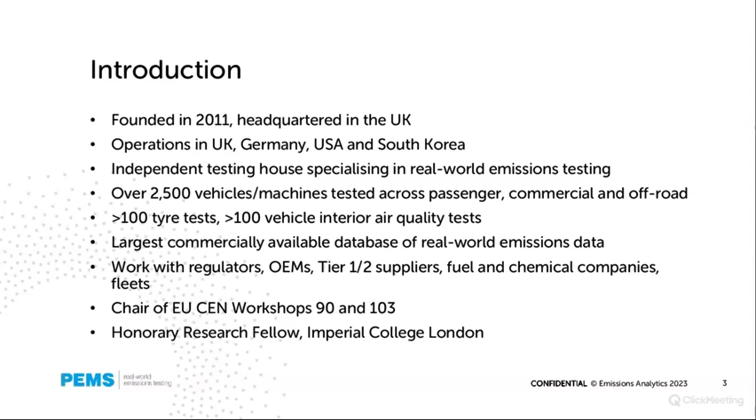So the agenda today, what I wanted to cover is a sort of recap of what the challenge is, really trying to keep it at a high level understanding of what the issue is, rather than getting drawn too much into any one specific area. Then I wanted to talk about the methodology that we've developed, which we think is an innovative way of trying to understand what's going on in the real world.

And then use that with some examples of renewable diesel that we've tested and renewable gasoline, not just looking at regulated pollutants, but also unregulated emissions as well. And the final bit would be to look at the issue of the actual chemical composition of the fuel itself. So looking beyond the basics of, is it EN 228 compliant or not, actually in much more detail than that, and how that might help us explain the provenance of these renewable fuels.

So moving into what is the problem? Well, it almost goes without saying, we're trying to reduce climate change related emissions and also improve air quality. The issue with renewable fuels, which is the flip side, of course, of the opportunity, is that they are there first and foremost to reduce life cycle CO2 emissions, so to contribute to the climate change solution. But the question relating to that is, how much do they actually reduce CO2 in practice? They often sound good, and from a marketing point of view, what's not to like? But by how much do they actually reduce in practice?

So can they be a material contributor to our decarbonisation, or are the reductions too small, too expensive, too difficult, that we just have to go straight to battery electrification on the assumption that that is free of emissions, which obviously it's not, but that's a topic for another day.

One other aspect of renewable fuels is maybe they reduce tailpipe emissions, but maybe they lead to increases in certain pollutant emissions. So what might we not know about hidden other increases in emissions? And there is also the important distinction that it may be okay to increase emissions a little bit if it's from a very low base and it still remains well within some regulated limit or health threshold. So the question is, where there are increases, does it take us above any existing limit values?

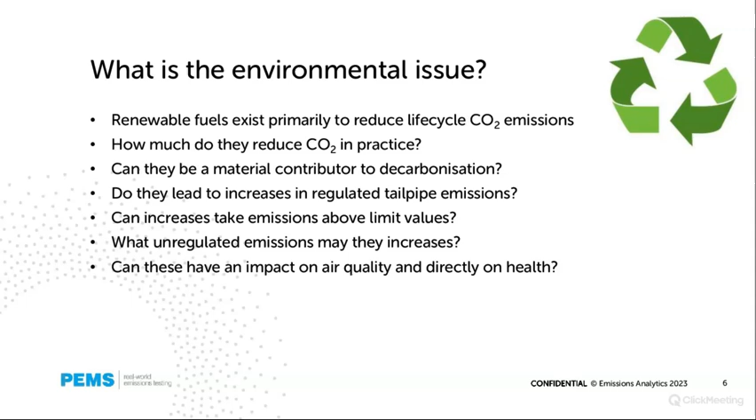And similarly here for unregulated emissions, there are obviously no limit values, but do they lead to some worrying levels on some other criteria? And also, can these have a direct impact on air quality and on health? And how do we understand that? So that's the issue at a very high level.

What is a renewable fuel? We need to be clear, and that covers a very diverse group of products. And it's an evolving definition as well. But the best way I can describe it right now is that these are fuels which are produced from renewable sources rather than fossil fuels. And actually, I should be clearer than that to say produced in part from renewable resources, because many of these first, second generation renewable fuels still have a potentially significant fossil fuel component. So it has some element of renewable non-fossil fuel component in them.

And examples would be bioethanol. So within that, the E10 we now find in the UK and some other European countries contains bioethanol blended into gasoline, where that ethanol is typically grown from crops. Biodiesel would typically use fats, which through transesterification substitute some of the fossil fuel components, and those fats can come, for example, from waste cooking oil. Biomethane, which we've done some testing on, for example, heavy-duty trucks converted to natural gas, where a proportion of that natural gas is biomethane, typically comes from the breakdown of organic matter such as anaerobic digestion. And those could be described as maybe the earlier generations of renewable fuels.

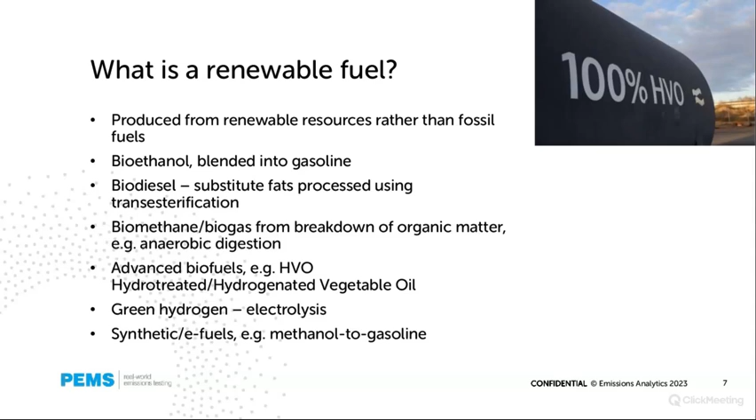And then finally, as we talked about right up top, the synthetic e-fuels question, for example, creating gasoline from methanol, which itself is created from a combination of sequestering CO2 from the air, combined with green hydrogen to create a near zero CO2 liquid drop-in fuel. I realize that is highly simplifying the matter, but just to give an overview of the landscape, I think that is a reasonable definition of what renewable fuel is.

And the challenge related to this is that we're essentially, for the intermediate ones, inserting some, quote, bio components into fuels, which may change the combustion characteristics for good or bad, and may change the energy density, often lowering the energy density, but also have an effect on the efficiency of combustion. And different combinations have different effects. It's not always in one direction. But nevertheless, this change in chemical composition can lead to an alternative mix of tailpipe pollutants.

Point one, and that's sort of the air quality related element of it, but also the CO2 reduction potential of these fuels doesn't tend to manifest itself at the tailpipe, though any changes in CO2 tend to be small. The CO2 reduction exists upstream in the supply chain, through using waste material or crops, which suck up carbon as they grow. And therefore the verification, we can't go along with a piece of PEMS equipment and go verify that CO2 reduction because it exists up the supply chain. But nevertheless, verifying that carbon reduction is really vital to understand the benefits of these fuels.

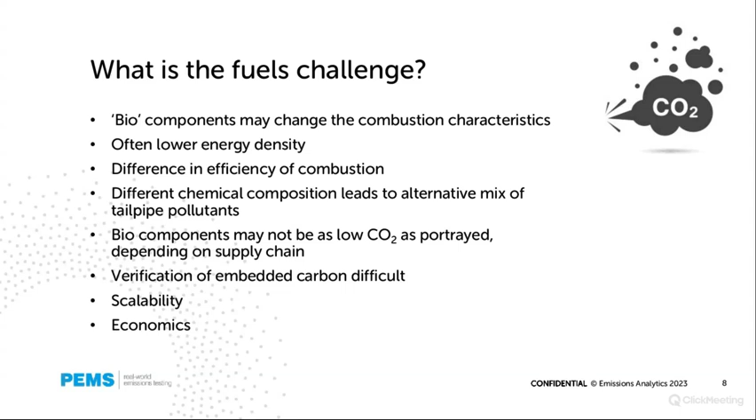And then also linked to it, which we won't cover today, is the questions of, this might work at small scale, but can it scale to anything that will help at a system level and economically as well? So that's the problem. Our concept for how we approach trying to test for this and understand it is what I would describe as holistic and comprehensive. Holistic in the sense of considering all the different vectors for the car creating an environmental impact, and comprehensive in the sense of trying to understand, as comprehensively as possible, what the pollutants are.

And this picture sort of neatly encapsulates what we do. So we are testing on the road, real cars on the real road, real drivers, real routes. Top right, we are obviously looking at the tailpipe, but as I will show, we are looking at an increasing number of pollutants from the tailpipe. There's tires as well. Now, tires is not relevant to today's presentation, but tires shed matter and off-gas VOCs, etc. So they are vitally important in the whole environmental impact of vehicles, and actually do have a tangential relevance to this topic, where substitute materials are being put in tires, for example, soy-rich tires. So in a sense, renewable tires, if you like. So we're not covering that today, but it's why you can see it's an integrated part of our approach.

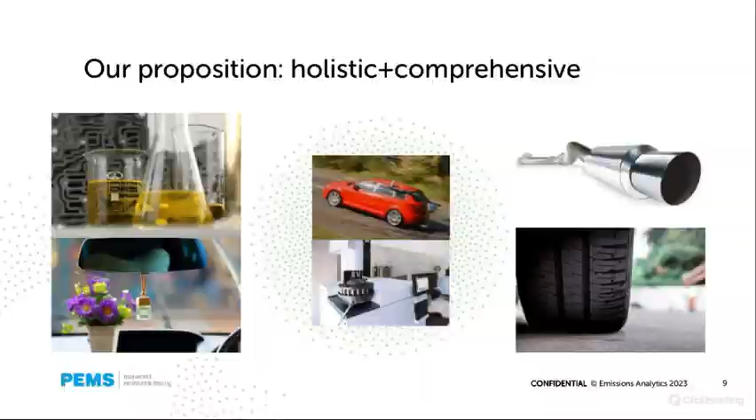Then we have vehicle in-cabin air quality. It's a massively underrated issue of, when we focus on air quality externally, how much actually gets inside vehicles and stays caught up inside vehicles. So in a sense, any pollutants that come out of the tailpipe can also be recycled into the cabin as well. And the final one is understanding the composition of the fuels. So for today, it is basically top left and top right that we're focusing on, the actual fuel composition and the tailpipe emissions themselves. And the equipment we use, and I'm going to skip over this first bit relatively quickly.

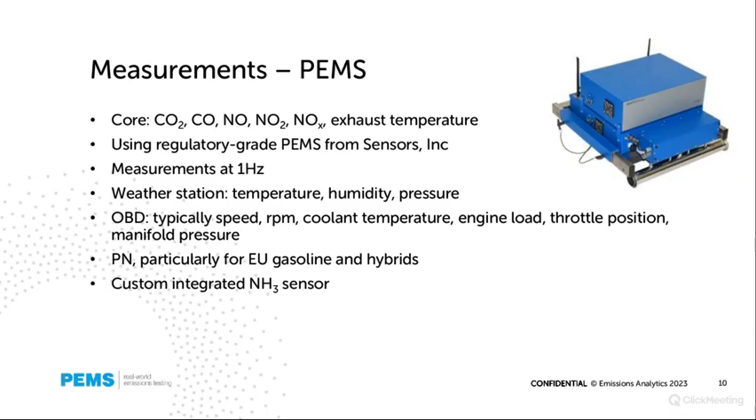Most of you will be familiar with the standard regulatory compliant PEMS measuring CO2, CO, NOx, etc. Also with particle number integrated and in real time, at 1 Hertz, OBD logging, etc. But to that, we have created a patent pending system which allows us to sample exhaust gas onto a range of thermal desorption tubes as the vehicle drives around, using a proportional dilution system, which allows us to capture that and derive from it distance-specific mass emissions.

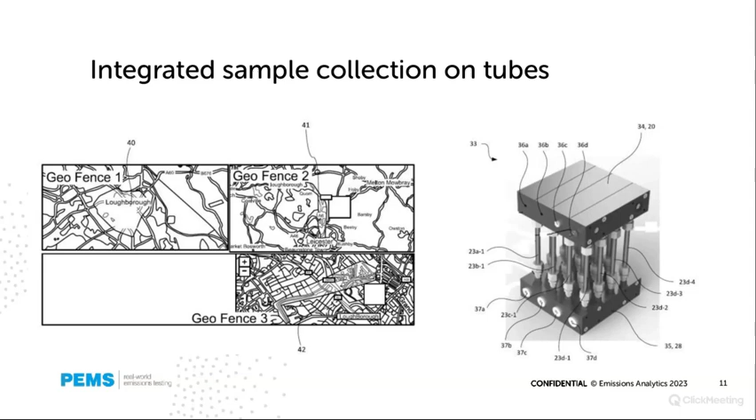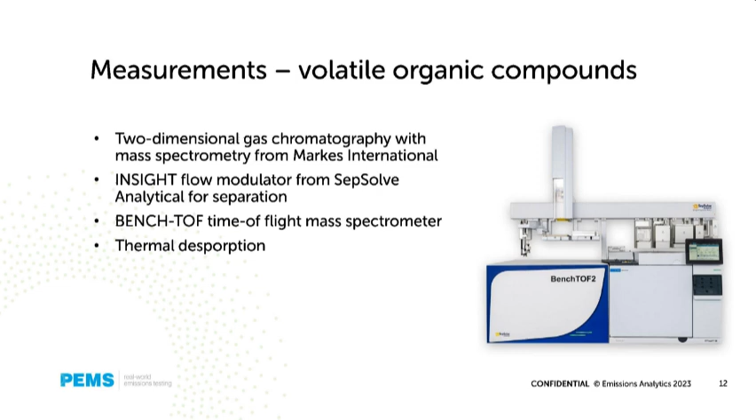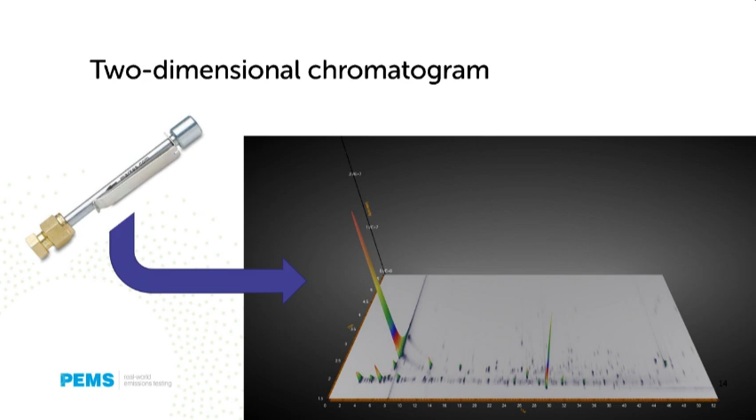And when we thermally desorb a tube, this will give you an example of what we see in the two different time dimensions of separation, and then the height of the peaks here. So each peak is one compound, and the height is an approximation to the mass present. So you can see typically in the example we are seeing hundreds of compounds off any particular tube, but in wildly varying concentrations, and the sensitivity of this system is at least at the ppb level, if not lower.

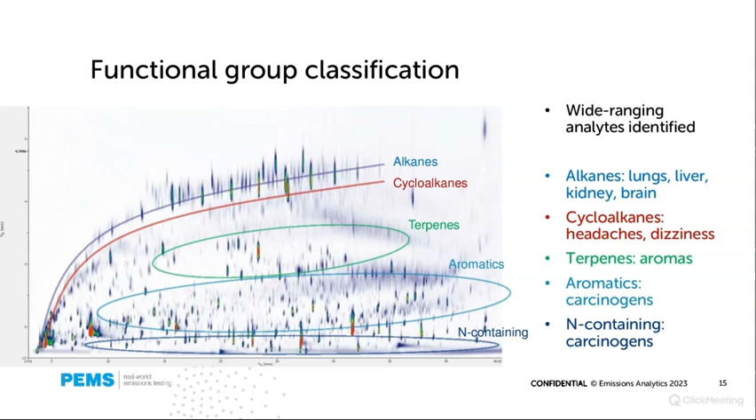It gives us an absolute wealth of information, but to make any sense of it at all, we have to group all these hundreds of compounds into some meaningful functional groups. So alkanes groups or terpenes or aromatics, which as shown on this chart tend to have common health and environmental effects, not consistent, but they associate with one another. And I'll come onto that a little bit more later on. So that's how we do it.

So let's move on now to looking at some renewable diesel and then some renewable gasoline. So the renewable diesel, I'm sharing part of the results we did from a very interesting test project with Thames Tideway. For those who are not in London, Thames Tideway is a massive project to build a big new sewer across London. London sewers were built in Victorian times and London is in desperate need of this big new sewer, which is getting close to completion. But excavating this created huge amounts of earth and other waste that needed disposing of.

And there was a twofold question. One, was it better from an environmental point of view to ship it along the Thames on a barge or stick it on lots of trucks on the road? That was question one. Question two was, is it better to power these vehicles by standard diesel, road or marine, or better to do it with HVO? Now here I'm just going to share the second part of that, so the standard diesel versus HVO results. And in this case, this was only on the truck part of it.

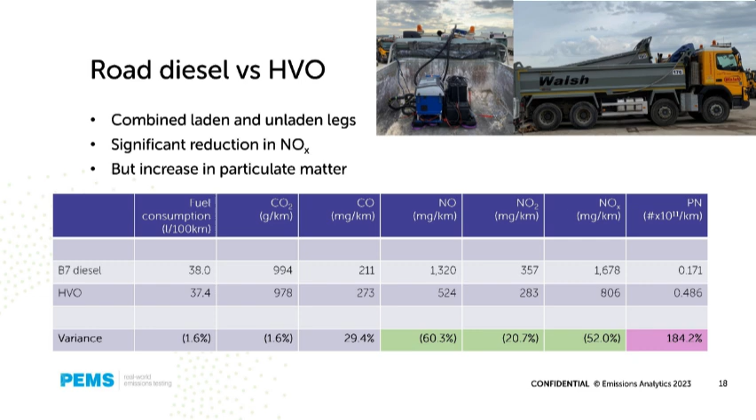In terms of the absolute levels we're seeing, particularly on the particles, it's well below. If we converted that to per kilowatt hour, or per kilometre, it's well below even the light duty limit. So this is my point I made earlier: even though it may be an increase, it is still not necessarily at a problematic level. But nevertheless, that is an area that may need to be looked at in more detail to mitigate, but we are crystallising some good reductions in NOx there.

But then there's the question. There's some benefits there definitely to be had, and there's some issues on the particle side to look at. But we need to look at the question of the provenance of these fuels. So were these fuels of the true origin? So this is now looking at, we tested a number of different HVOs from different sources and looked at the chemical composition of them. And I should just be clear, this was not linked to the Tideway test. This was a separate piece of work taking HVO from multiple different sources. And it's trying to get to the bottom of, when you buy HVO in the market, does it live up to the billing in terms of its credentials?

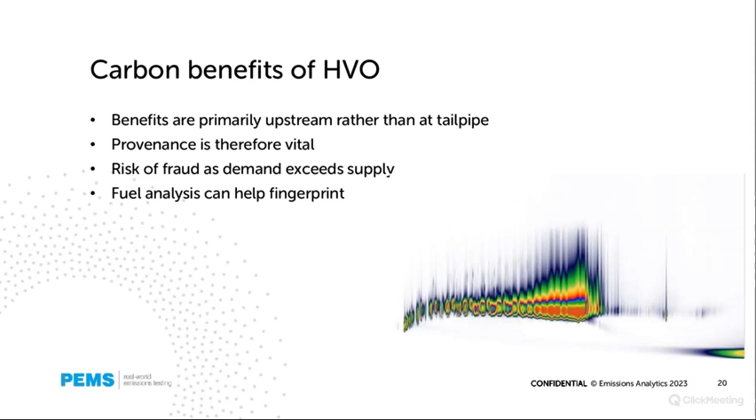And here, this is just a chromatogram, which shows what the chromatogram of a typical fuel will look like when you do a liquid injection to the 2DGC. And what that really is, it's a chemical fingerprint. So thinking about the idea of a chemical fingerprint, we can look at the actual results here. So there's 4 different types of HVO, different ones from different sources, compared to a B7 diesel reference.

And to keep things simple, I've shown a number of metrics here, which is the number of organic compounds that we found and identified in the sample, and then the proportion of the area under those peaks on the chromatogram that go in the aromatics and PAH group in percentage terms, how much are in the alkanes group, and also looking at it in terms of what proportion are oxygenated compounds. I know that does cut across the other 2 categories to some extent, which is why it doesn't add up exactly to 100%. But looking at the oxygenated percentage is also quite insightful.

So what we see is that typically we're talking in the hundreds of compounds, but it's the fossil fuel B7 diesel which has the highest number of compounds at 669. It should be noted that it goes to show how many organic compounds there are in these products anyway, and the complexity of understanding them. But what jumps out here is that of 4 different HVOs, so things marketed as HVO, 1, 3, and 4 are pretty similar. They're dominated by alkanes in the mix. They're in the sort of 200 to 300 level of organic compounds.

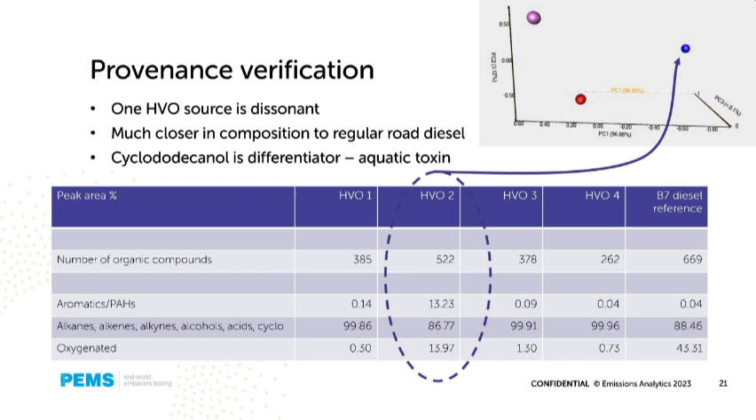But let's back up and not be quite as controversial, and simply say it is likely that the CO2 reduction credentials of HVO2 are not as good as the CO2 reduction credentials of the other HVOs. Therefore, if we are to scale these renewable fuels as solutions, then we need to understand these differences and bring about a much greater transparency and standardization about the composition. So that's on the diesel side.

Let's move on to gasoline. So for this, the main data I want to present is from a recent test program we did last October, which was looking at the difference between E0 and E10 in recent model year passenger cars in real world on-road driving. And the fuels here were blended specifically to EN228. This is all on the road at the same time of year, same conditions, on our standardized EQUA test route, which is about 3.5 hours long, made up of a combination of cold start, urban, rural, and motorway driving.

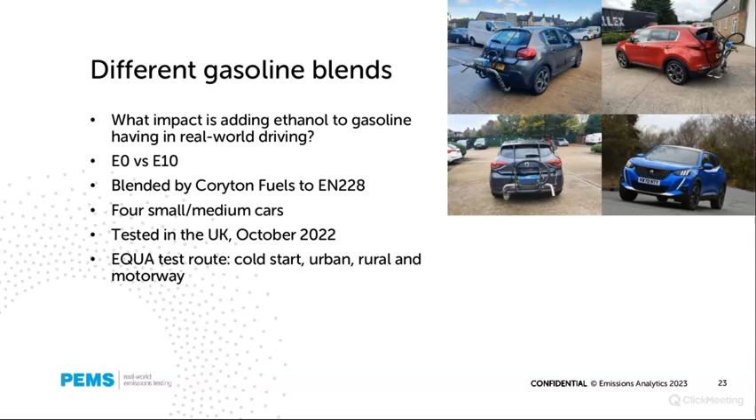And firstly, let's look at the regulated pollutants by vehicle, focusing on carbon monoxide and NOx. And here we're showing in the shaded boxes the direction. So green is good in that it's lower, and pink is higher. So what we actually see is quite a good level of consistency in the direction of these pollutants between the different vehicles. The average reduction in carbon monoxide was 31%. And the increase in NOx was 21%. However, it must be flagged that that absolute increase in NOx was small, i.e. from a very low base, and even on E10 was 90% below the regulated limit.

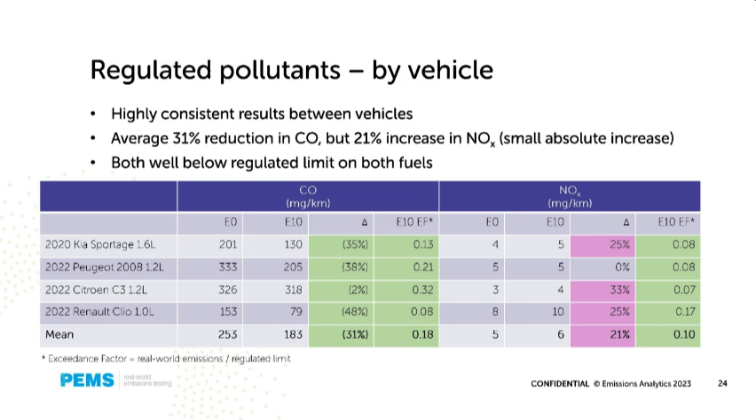So where I say EF, that is the exceedance factor, the ratio between the real world emissions and the regulated limit, which in this case for these Euro 6 vehicles would be 60 milligrams per kilometre. And also, the CO is well below in all cases as well. But we have to remember, gasoline vehicles don't generally have significant gaseous tailpipe pollutant problems anymore. So we're arguing about making slightly cleaner or slightly dirtier something which is already quite clean. But nevertheless, that's what we're able to measure and show.

But then let's look at some unregulated pollutants using the GCMS approach. And now, why are these important? So these are not regulated, and actually, sadly, they are not being slated for inclusion in the light-duty Euro 7 either.

So why these unregulated pollutants, particularly VOCs, matter is that they have an ozone formation potential, which can lead to increased smog levels, which we saw during COVID as the amount of NO2 in the air was reduced. They also have a secondary organic aerosol formation potential as well.

And the four areas I want to look at is firstly formaldehyde, which in terms of human health is an irritant. It does bad things to your lungs, and is a carcinogen as well. But it's not so much of a problem for other environmental reasons because it is non-accumulative. But other aldehydes, including acetaldehyde, can damage organs, can create inflammation and pain, are carcinogenic, cause heart disease as well, and for plants can inhibit growth.

Then I picked out toluene as a relatively high concentration organic compound in there as well, which is an irritation to skin, eyes, throat. It causes damage to some organs and is a possible neuro and reproductive toxin as well. It's also moderately toxic to fish and plants.

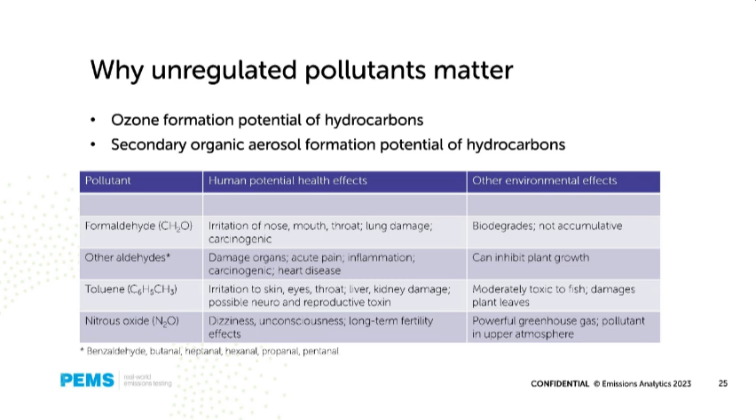So those are the four I wanted to pull out, although we do have the full chemical profiling of typically about 400 or 500 compounds in each exhaust. So here we are looking at this. This is summarized by vehicle across the combined cycle for those four different vehicles that you can see. And what we see overall, just at the macro level, looking at the color coding, is that there's a lot of variability between the vehicles and between the pollutants as well.

And so, I've given the mean figures there, and those means are disguising a lot of variation, but on average, there is an 18% increase in formaldehyde, but a 20% reduction in the other aldehydes. It's toluene that stands out as almost doubling, with big increases on three of the four cars. But interestingly, N2O, and maybe not very surprisingly, doesn't make a great deal of difference one way or the other.

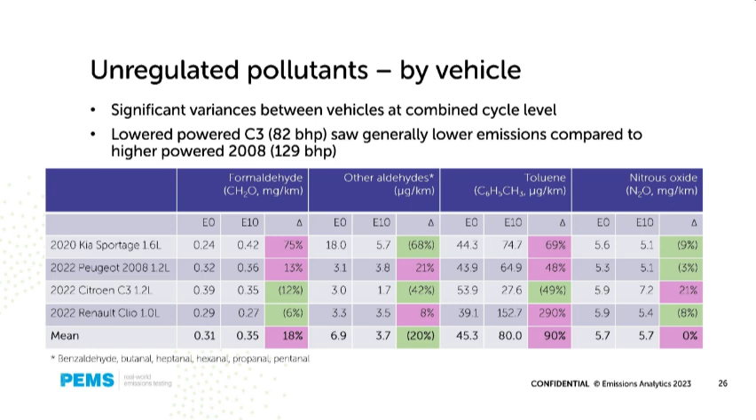And there are two cars there, the Peugeot 2008 and the Citroen C3, with the same base engine, but with different power levels, and therefore different calibrations, which lead to quite different results.

If we then cut the same data, but look at it by the different parts of the cycle, averaged across the four vehicles, we actually come to a much more consistent position, where the formaldehyde is up in all cases, as is the toluene. So at that level, there are obviously the mix effects which are creating these averages.

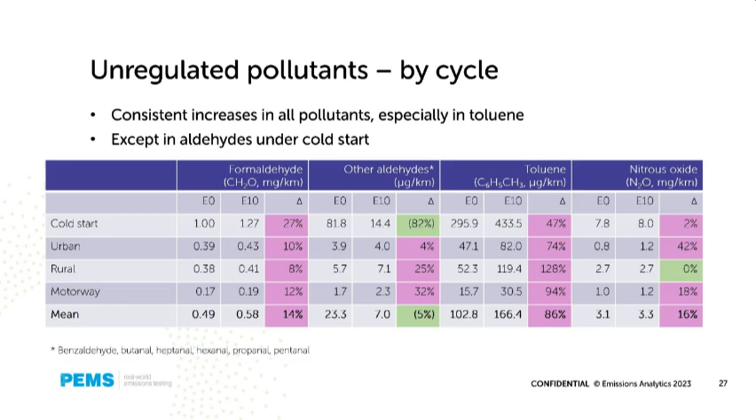But you can see particularly, say, in the cold start, the effects on the formaldehyde and toluene, but a reduction in aldehydes. But on the motorway, there are increases in all pollutants, and indeed on urban as well, and almost on rural too. So we can cut that data in lots of different ways.

But that was comparing E0 to E10, and in many countries in Europe we're increasingly at E10 already. So what happens if we push that 10 to a higher number? In the last bit of this presentation, we'll just quickly look at some work we did with Volkswagen and results they presented late last year at FAD in Germany, which was to look at some alternative blends, including E20.

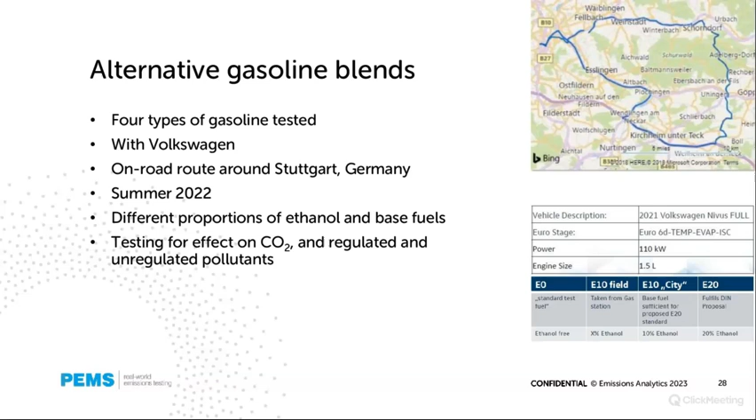So we tested four different types in the end, which you can see on this slide, on a Euro 6d-TEMP vehicle around Stuttgart in Germany, looking for the effect on regulated and unregulated pollutants again.

So on the regulated side, and you can see in the key, it's the far dark blue bar, which is the E20, that you do get lower CO2 emissions and particle number emissions as the ethanol proportion increases. But the CO emissions do increase somewhat on the E20. So a pretty good, not quite unambiguous, but certainly on the CO2 and the PN side, a clear trend of reducing emissions as the proportion of ethanol increases.

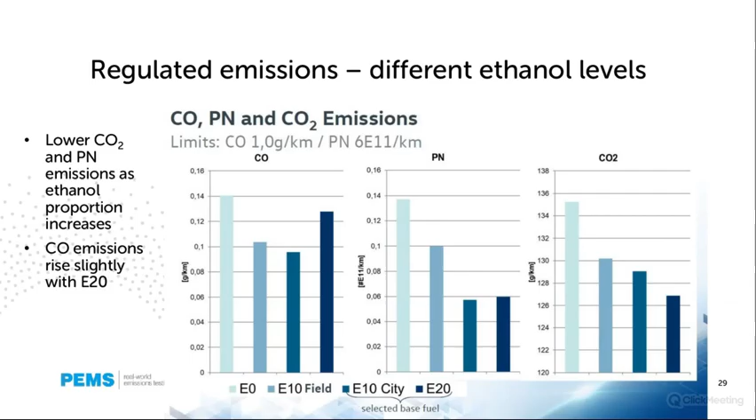But looking at the unregulated side, looking at formaldehyde specifically, split between the different parts of the cycle, and then I put in the aggregated oxygenates on the cold start cycle. In all cases, or almost all cases, we are seeing the highest formaldehyde and oxygenate levels on the E20 level. So that, in a way, is in line with the concern from the chemistry of the combustion, whereby increasing the amount of these oxygenates in the fuel may well lead to the formation of formaldehyde and other aldehyde emissions in the tailpipe.

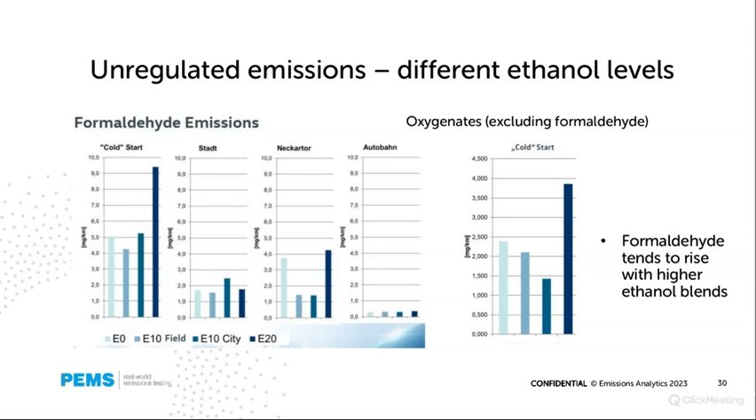And so we may well and are likely to find ourselves in the position of trade-offs between the CO2 reduction credentials and some increase in the air pollutants. However, that's where we then need to study as to whether these increases are actually very small in magnitude, below any levels of concern, and so are actually all in the acceptable range.

So in summary, and I realize I've gone slightly on, but I had quite a lot to cover, but we still have good time for questions.

So in summary, firstly, putting PEMS together with 2D GCMS, we found is a very powerful way of understanding fuel properties and tailpipe emissions. And in a sense, this presentation is almost just scraping the surface of the detail available through the test data we collect. Renewable fuels can definitely make some reductions in regulated pollutants. The ethanol in gasoline may lead to certain increases in certain aldehyde and other emissions, but overall it's a mixed picture and very vehicle specific. And so as we focus on this more, engineering calibration optimizations may well be able to mitigate this, but it does need to be studied.

Within the macro context, we do have to face the concern that everyone is going to want these types of fuels now. And particularly if Germany is successful in getting a carve out for certain types of fuels, the supply pressures and therefore the fraud risk will increase. So understanding and verifying the credentials of these fuels is important. Fuel fingerprinting is a way of doing that. Now, this concept may be seen as a burden to the renewable fuels industry, but I would say it's actually absolutely vital.